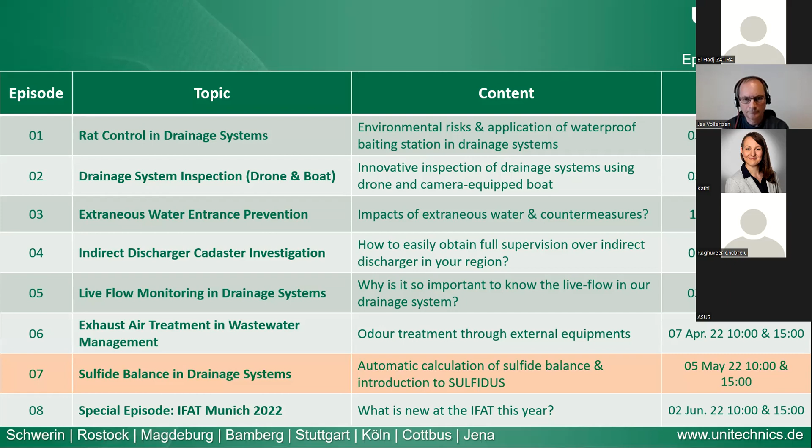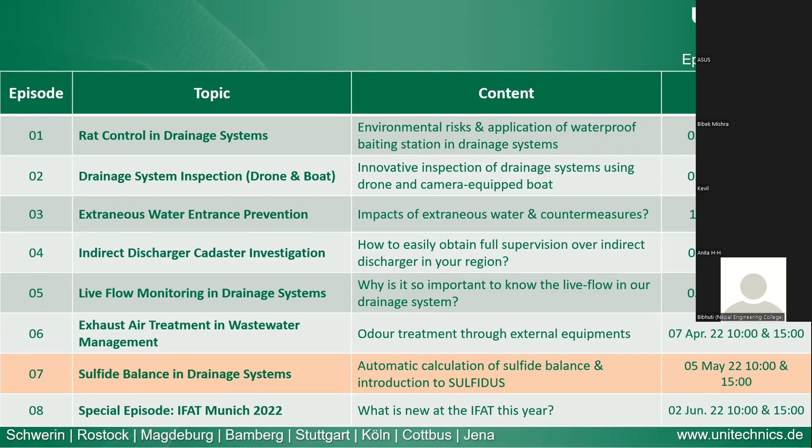Okay, besides Klaus, we still have a participant, Asus. I think that's... okay, can you hear us? Hello, yes, hello.

I'm Zeynep Amin, I'm Iranian but I'm connecting from Turkey. I have a PhD degree in environmental engineering, especially I've worked about wastewater sludge and drying it and composition by renewable energy, by solar dryer. So that's my major, thank you so much.

Thank you very much and welcome to Wastewater Talk. Now we have Klaus back. I'm sorry, I had a private emergency, but I heard everything. So, Klaus Jirk, my name. Siqi and me, we are providing a little bit of organization for all of this, and I'm looking forward to all of your opinions and so on.

And the current issue was a wish from some of our participants earlier. We had a similar issue like today already, a little bit ago, like 6 months ago. And today we hope it's still interesting - odors are still a problem, especially when it gets warmer. So I'm looking forward to everybody's opinion.

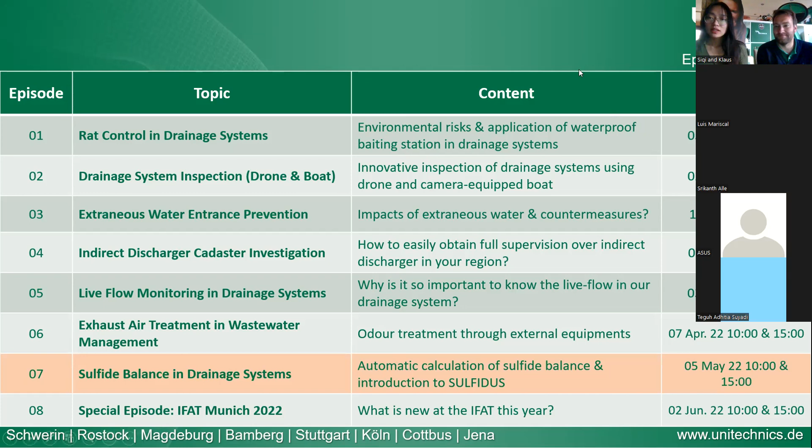Good, thank you. So I will go on with my presentation. As usual, a very quick introduction to Unitechnics. We're an engineering company based in Germany. We deal with odors, corrosion, extraneous water, any kind of problems that you could find in sewer systems. Last year we just celebrated our 30th anniversary, and we offer engineering consulting, investigate the indirect discharge for municipalities. We also inspect the sewer systems with drones or with camera boats.

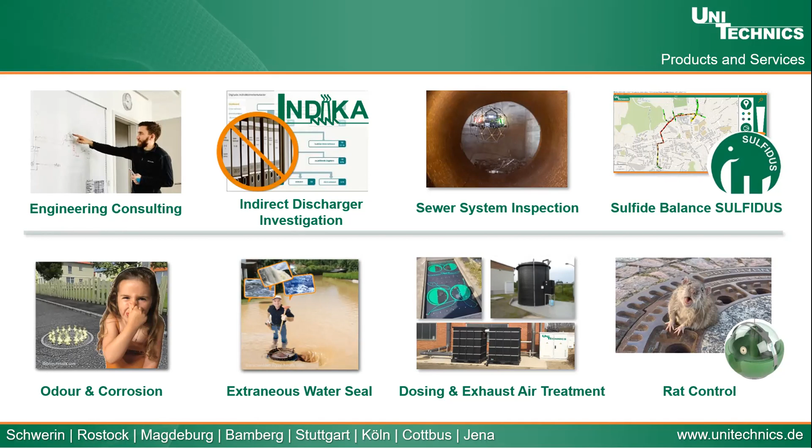And then it's our topic today, the Sulfidus - a software we developed for simulating or modeling the hydrogen sulfide formation and emission in the sewer system. And then we have the products against odor, corrosion, extraneous water, and rats. And for special cases, we also design the dosing and exhaust air treatment, which was the topic of the last episode. So we will jump into today's topic.

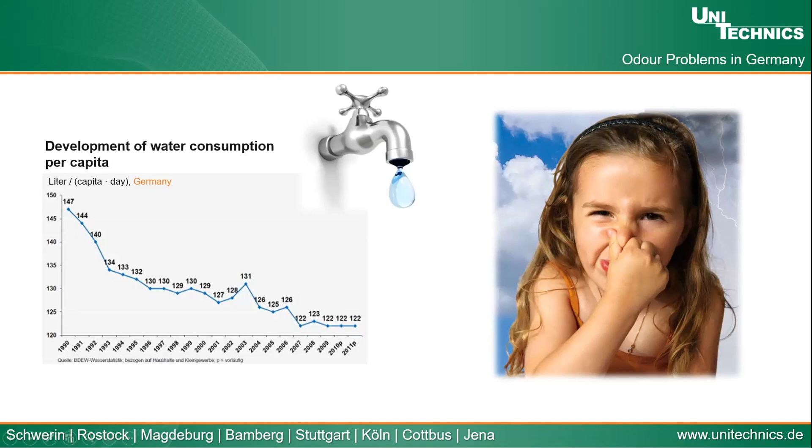To talk about odor problems and odor solutions, we first need to understand the odor problems in Germany. You can see from this diagram here, from 1990 till now, the water consumption in Germany per capita has been decreasing rapidly, and with less water consumption, there's also less wastewater generation, but we still have the same size of sewer systems underground. That leads to a longer retention time of the wastewater in our sewer systems.

This will be a contributor to the formation of the malodors, such as the hydrogen sulfide and many others. Another contributor in Germany is that you can see from this photo that we have these manhole covers, and no, not like the manhole covers I have seen in other countries.

Here we have these ventilation holes, and this will lead to another topic about whether we should have them so that the corrosion situation in our shafts will be less severe, or should we remove them so we don't have odor problems in the city, but there will be more severe corrosion problems in the shafts. So this we can also save for the discussions later.

Anyway, you see with these holes, it brings the problems that were underground now above the ground. So the hydrogen sulfide that has been formed in our sewer systems now will emit out through these holes into the city. And then you get complaints from citizens that they smell the odor, and that's very unpleasant. And then that's the time when the cities or municipalities need to do something against this odor.

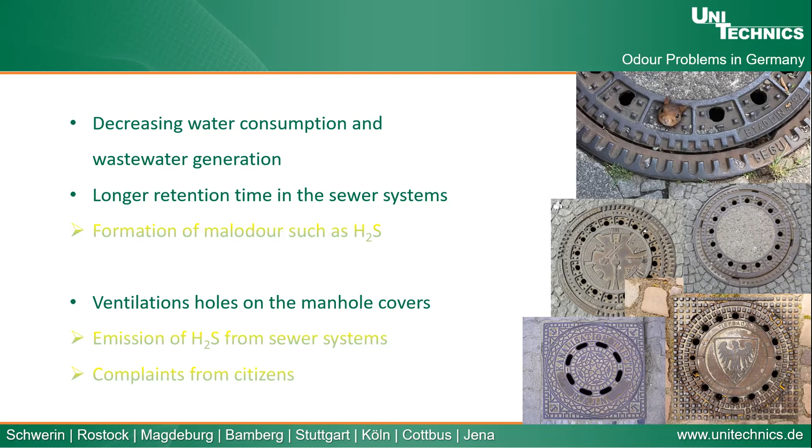So here with this photo, you can have a clear view about the sulfide transformation, conversion, or formation in the sewer systems. So with long

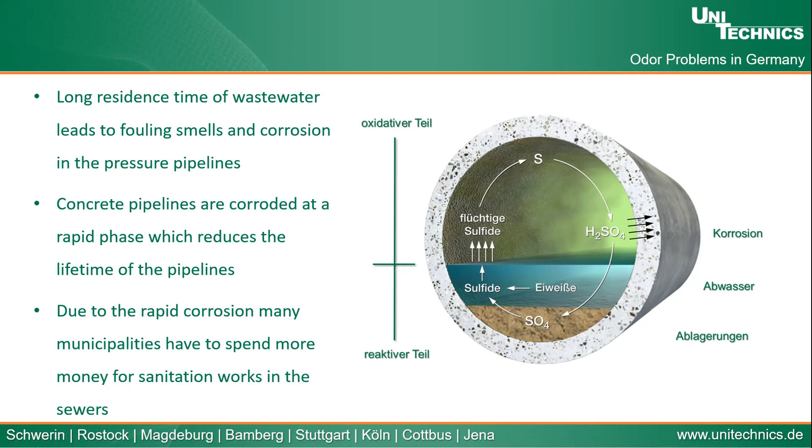retention time of the wastewater in our sewer systems, it will lead to fouling smells and corrosion in our pressure pipelines. And these concrete pipelines will be corroded at a rapid pace, which will reduce the lifetime of the pipelines. That means the city will pay more money for maintenance or sanitation of the sewers, and that's not what they want. And that will lead to our solution to it.

In the past, we did this sulfide modeling or simulation manually with thousands of tables. And since 2014, we combined all these manual tables into a software called Sulfidus, so that we can simulate this sulfide formation and generation in our sewers in a faster way.

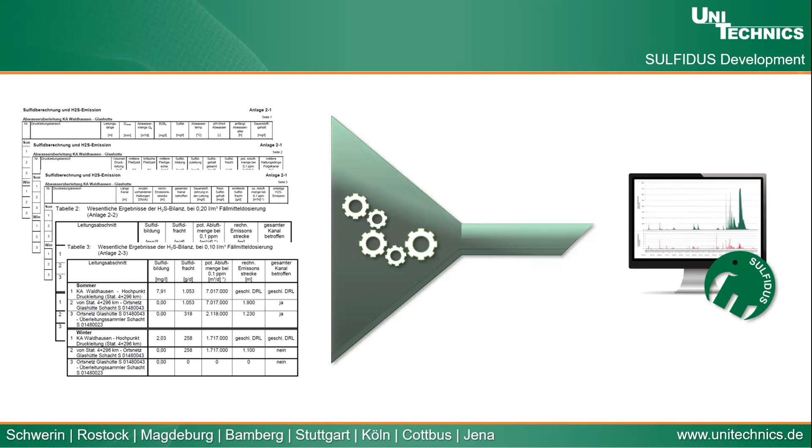So what does this software do, or what is our solution? We use this software first to digitalize the drainage systems. This information is normally given by the cities, and then we simulate different complex processes under different situations, or scenarios: the best case, worst case, the standard case.

And then we calculate the oxygen consumption and, most importantly, the hydrogen sulfide formation. The results will then be visualized on a map for better understanding, so that everyone can understand where the problem is and how severe it is.

And this I will also show in the later slides. With this software, we try to identify the odor emission or the biogenic corrosion development at an early stage. And also for the cities, with the new planning of the sewer systems, we can optimize these systems for the operators and the planners.

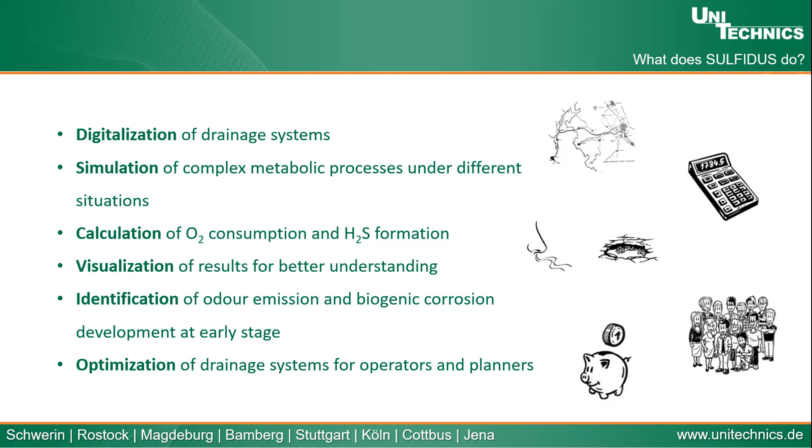The workflow of this Sulfidus can be divided into 5 steps. First, we analyze the input data, which normally comes from the cities, like I mentioned before. Then we model this sulfide generation with this input data to find out the track of the emission and also the potential damage.

Then we have different options against this odor. After the simulation in Sulfidus, we have a clear view about how severe the odor problems are in a city. And then we can choose the optimal solution from the different options that we have.

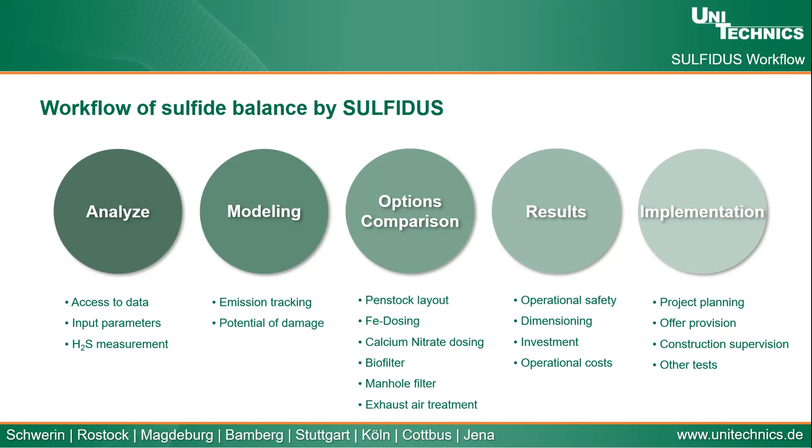For example, we can use a dosing system, or a biofilter or filter that can be easily installed in the manhole, or exhaust air treatment. From this alternative analysis, we get the results, the options that we want. We need the information for the dimensioning, and we also give the information for the investment and operational cost and so on. In the end, we implement these solutions, for example, install the exhaust air treatment, or build in the biofilter or manhole filter, or establish a dosing system.

This is the user interface of Sulfidus, and you can see here is the map of the area of interest, and on the right side is the toolbar where you can draw the wastewater pipeline systems manually with different types, like pure rainwater, pure wastewater, combined wastewater, or pressure pipelines.

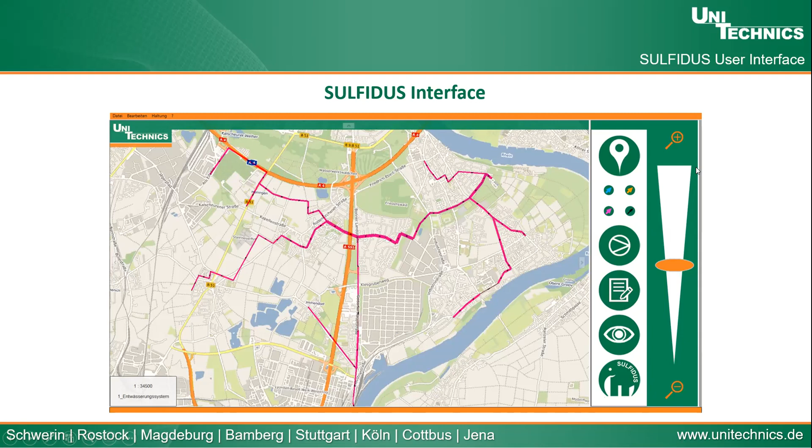You can give the input data by clicking here, or review the results with this eye icon, and this elephant icon with Sulfidus written on it is the calculation button. And here you can zoom in and zoom out to have a better look at the results.

So for the input data, there is basic data and additional data. Basic data includes the diameter of the pipeline, length, how much water flows, and the basic parameters for wastewater quality. Additional data includes secondary inflow, the type of drainage system, operating roughness, and so on.

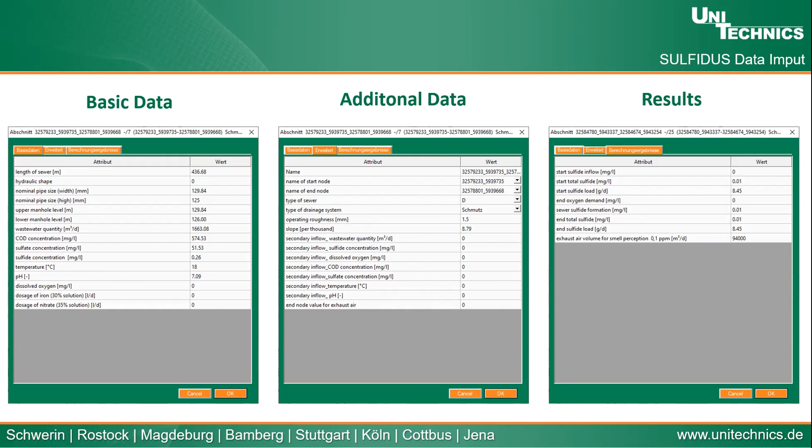After the analysis or simulation in Sulfidus, we have different solutions or recommendations for solving this odor or corrosion problem. Basically there are chemical or physical solutions. The chemical solution is dosing - we can use different chemicals. For physical solutions, we have compressed air flushing, exhaust air treatment or filters, and so on.

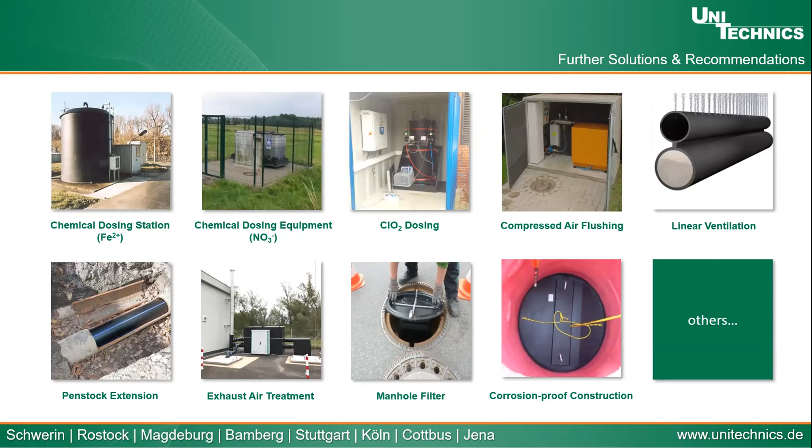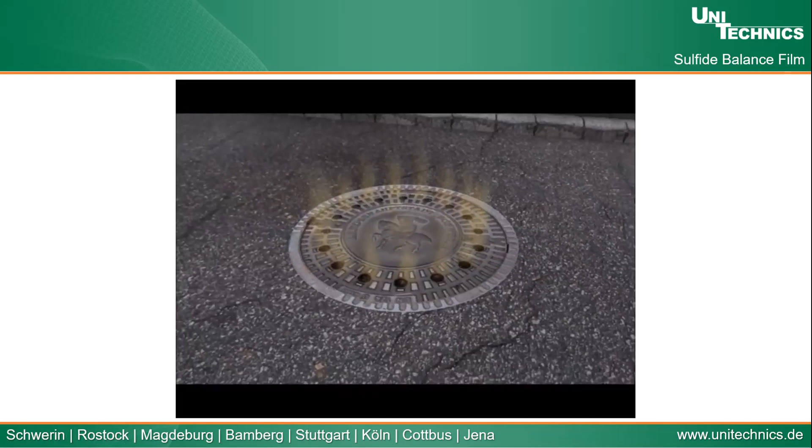So here's a short video explaining the problem with this odor. You see here we have this manhole cover with the ventilation holes, and the odor is emitting out. Under this manhole cover, there's a lot of generation of hydrogen sulfide or other kinds of malodors.

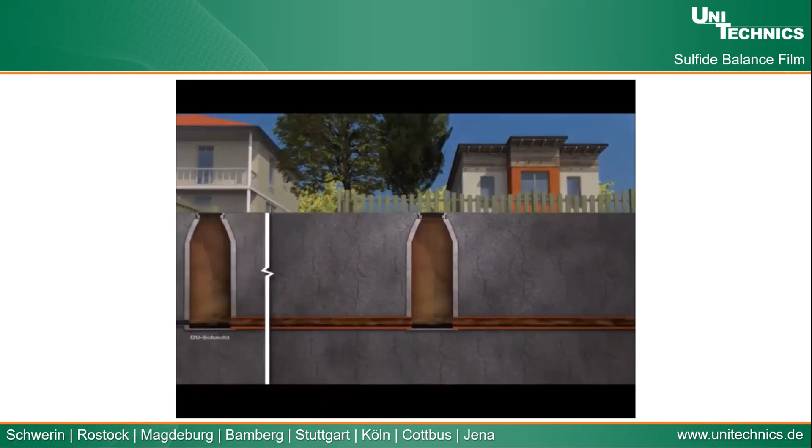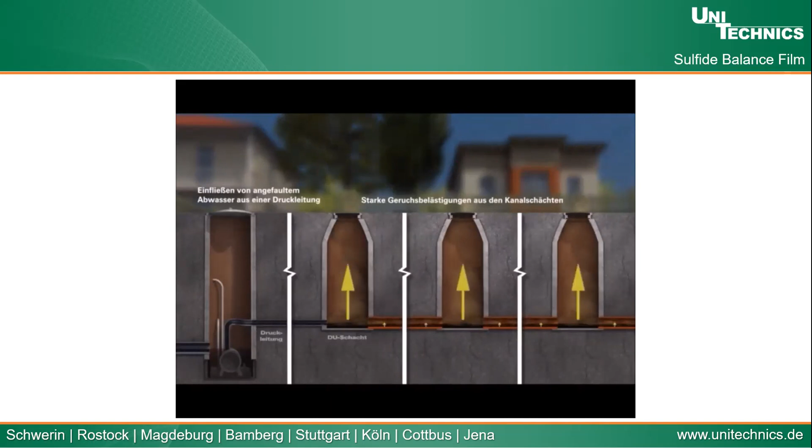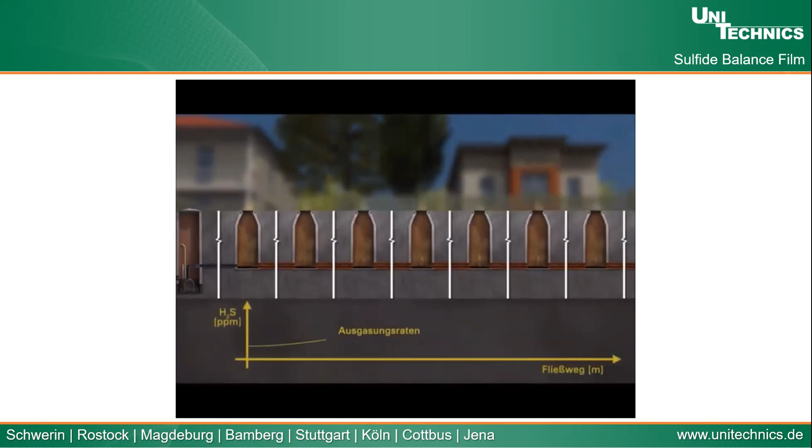On the left side we have a pump station, and the water is being pumped through a pressure pipeline, meaning there's not enough or no supply of oxygen. Later, when the wastewater comes out from the pressure pipeline and reaches the free surface, the odor will emit out.

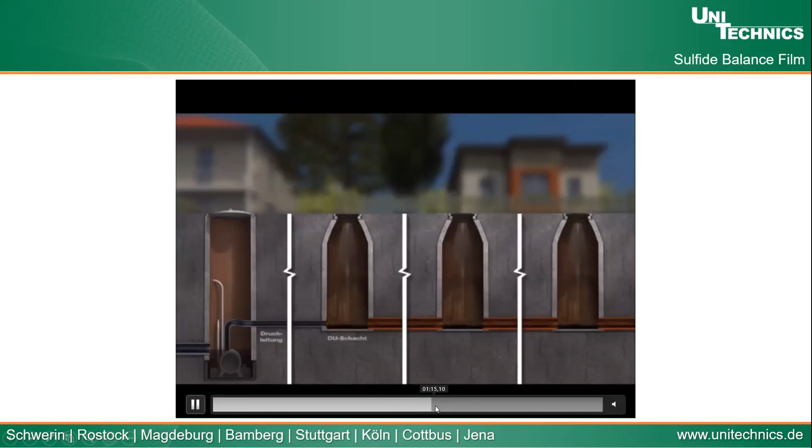In the past, we had this much water consumption, and now water consumption has been decreasing, so is our wastewater generation. That leads to an even more severe problem with odor and corrosion in our sewer systems.

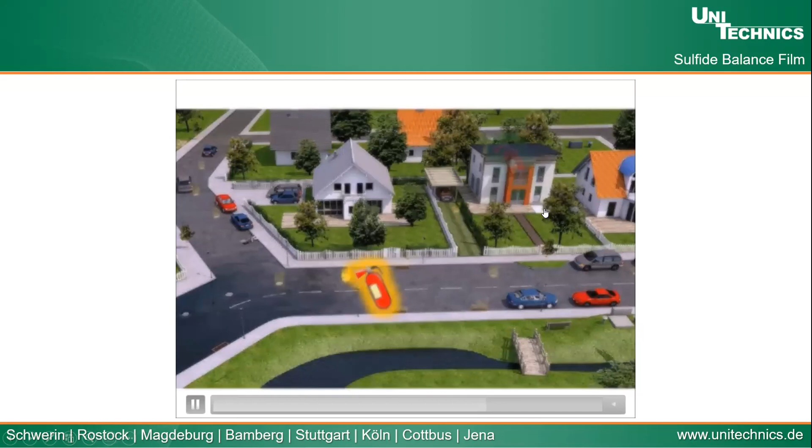So you can detect these odors on the streets, in your own house, or in public areas - anywhere, especially in Germany when you have this ventilation holes.

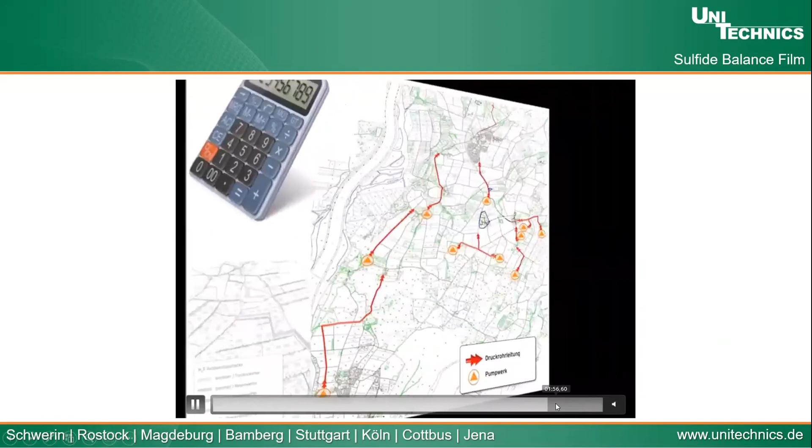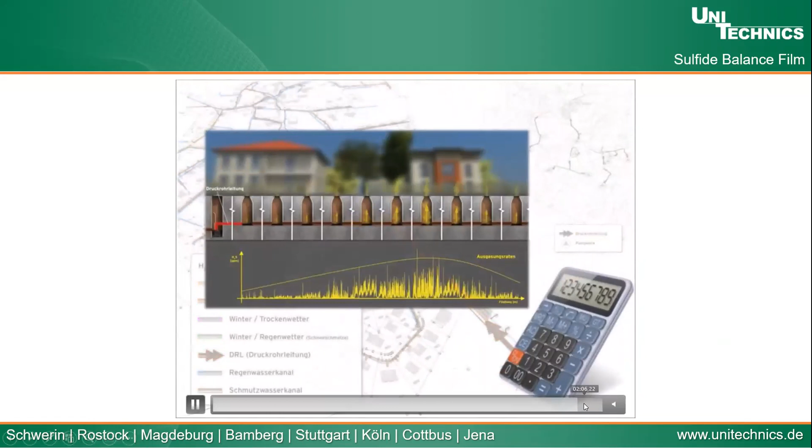So we did our calculation and simulation to develop this software that can simulate the hydrogen sulfide generation and emission track. This will help operators save money and give citizens a better, more pleasant atmosphere.

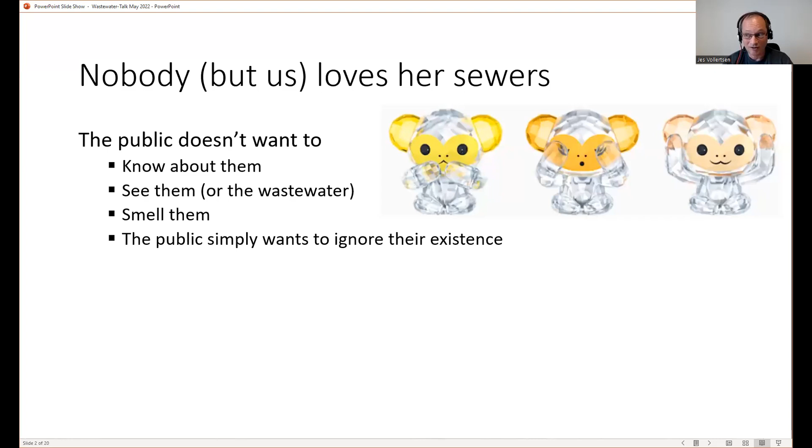When it boils down to what this is about, I think nobody really loves the sewers - maybe we love our sewers, but we're not the general public. If you ask the general public, they do not love them, right? They don't want to know about them, they definitely don't want to see them, like wastewater on the surface, and definitely don't want to smell them. They basically want to ignore their existence. But they do definitely want the service they provide - they want the toilet to work, they want all the services without interruption or fuss. So it is a hidden infrastructure that is super important, but has a little bit of a different life.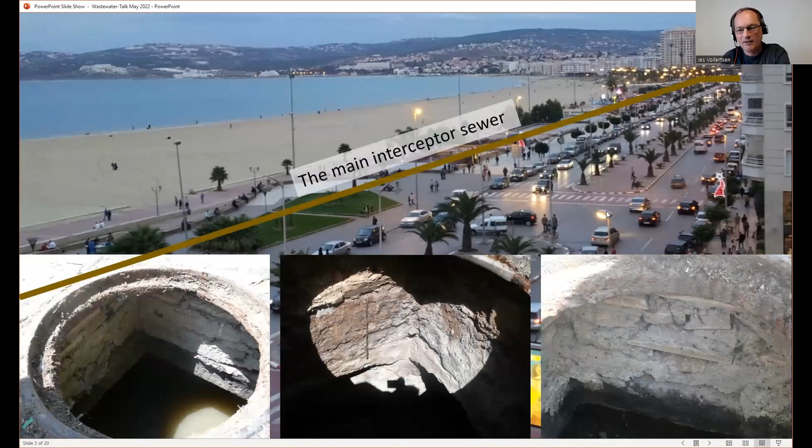The reason why this is not the case is because there are 3 or 4 parallel huge interceptors with stagnant water, not very well operating, lying in the road here. And if you open the manhole covers, it looks like this, right? Corroded concrete, corroded cement, and so on. You see the wastewater there, really stagnant, and it definitely smells.

So you don't want to have your coffee shop and your cafe latte at the beach, and along comes a whiff of sewage. This is not only happening in this place, it's happening everywhere.

This was a very early study we did. I think it was 10 years ago or something. And then we used the software I will come into later on, which we developed, to simulate the system in order to get an understanding.

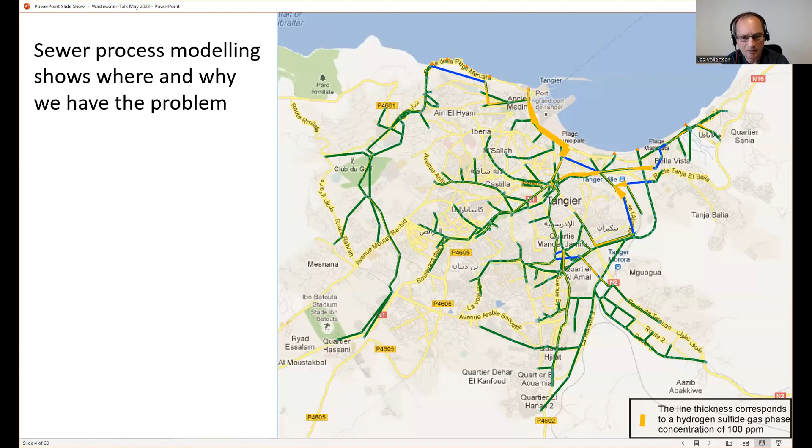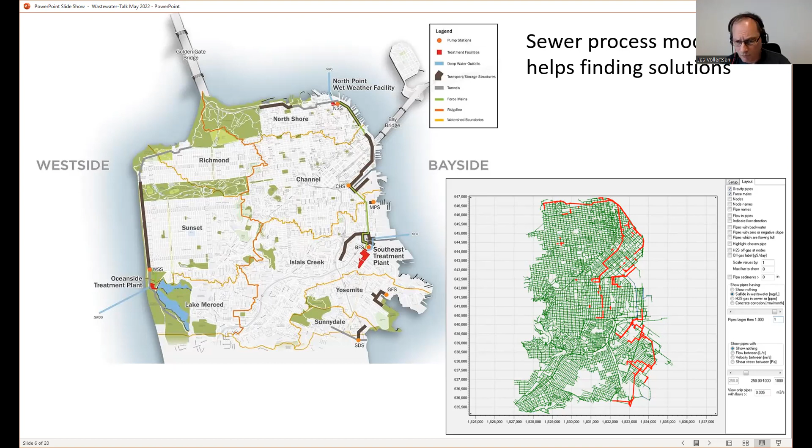This is again some of the early studies we did back in, I think, 2014 or 15, on sewer processes. By the way, the very first study I did on really big catchments was Abu Dhabi in the United Arab Emirates, where we did our first sewer study in 2008, the big one. We also did some before.

Another thing you have to keep in mind when you think about odors is odors is not odors. In some places it does not matter that it stinks, right? This is the wastewater treatment plant of San Francisco. It smells horrible. If you come there, it really stinks. It does not matter, because this is really a bad neighborhood.

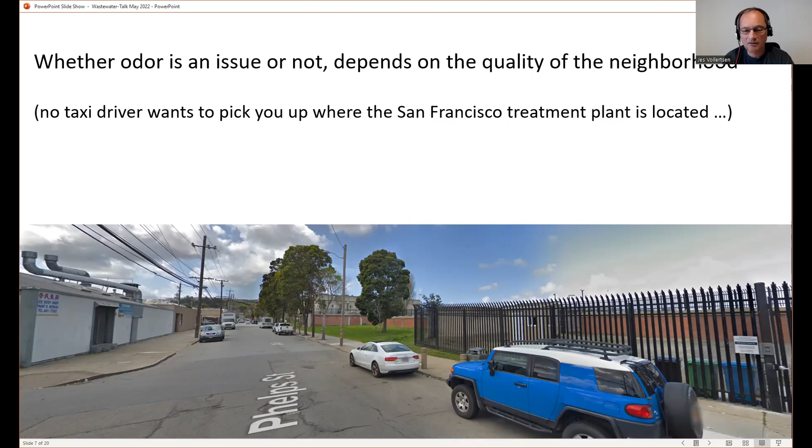It's so bad a neighborhood that the taxi drivers were not coming down there to pick you up. So I at some point got stuck there and couldn't get away from it. It doesn't matter that it stinks there. But if it's Embarcadero, where the tourists are, it matters a lot.

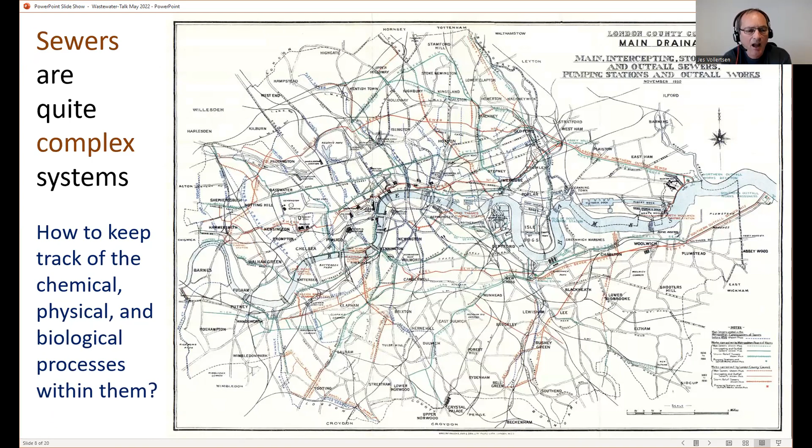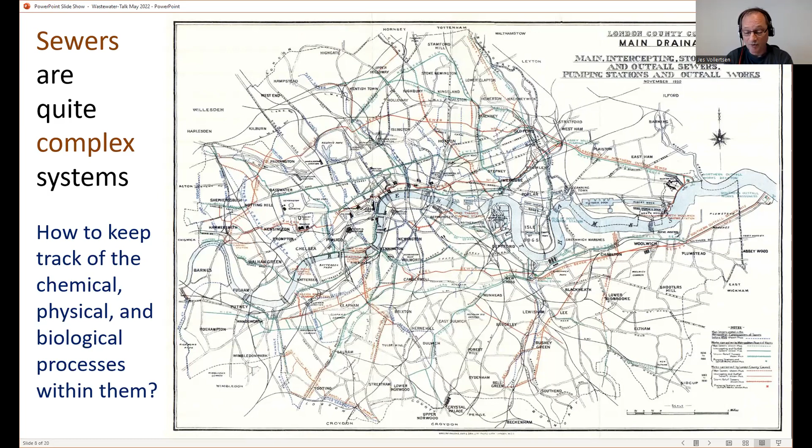So how do we get a grip on all this? How do we get a grip on this fact that sewers are super complex, and how do we keep track of all the chemical and biological processes within them? Because they are pretty complex. Not only the networks - this is an old picture of London, right? Not only the networks, but also what happens in the sewers is pretty complex.

From the very beginning, there was this understanding: let's try to model it. It started out around 1947, with the first risk models saying that if your sewer looks a little bit like this, you have a high risk or low risk for odor and corrosion issues. Then along came the empirical models, which are fundamentally 1 or 2 or 3 equations used to predict sulfide formation, oxygen consumption, and so on.

And then it was developed here in Aalborg in the late 90s. We developed a process concept, and this process concept describes, in principle, all the stuff that happens in the sewers - in the water, in the biofilms, in the sediments, in the air, and whatnot. And then, because, as I mentioned earlier, I am a nerd in programming and coding, I wrote software that could accommodate all these different processes. I'll come back to that.

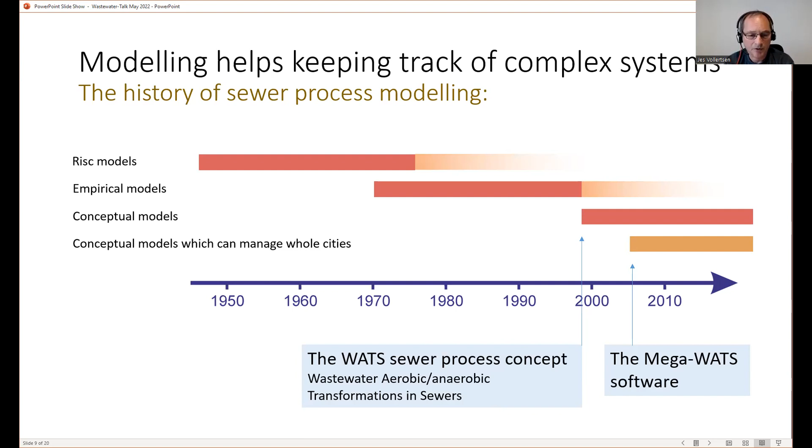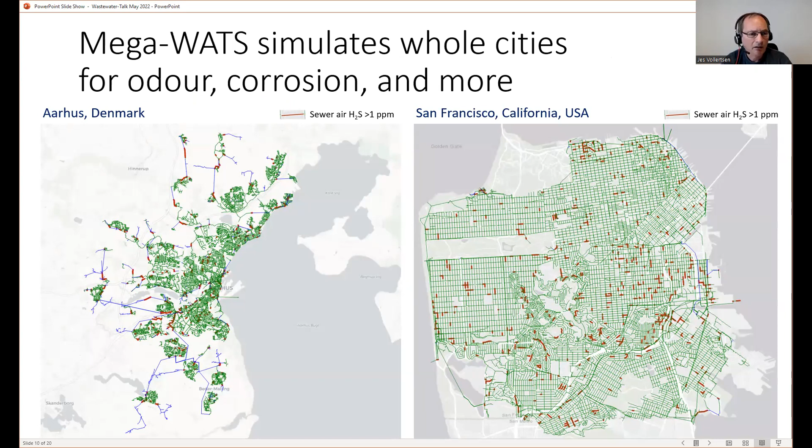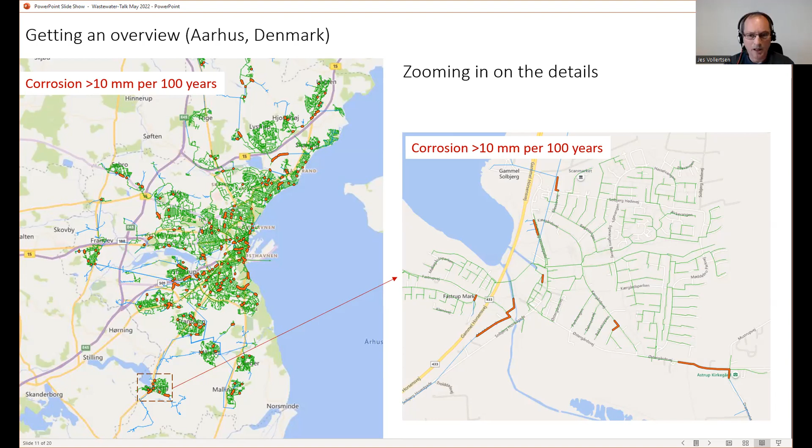It is the model. So what you would use something like this for is then to see, okay, maybe I should focus my CCTV inspection on certain pipes. So you would go in and say, this is maybe a critical pipe. Maybe I would go in here and do some inspection to see if I really have this bad corrosion as the model predicts, and if the pipe is close to collapsing in this case.

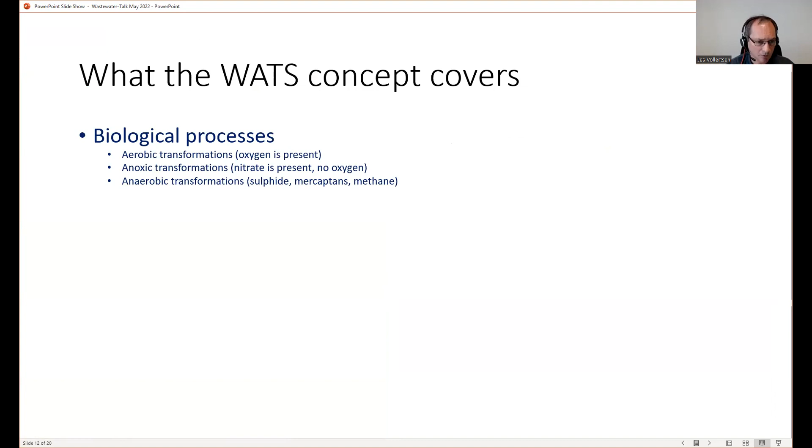Just very shortly to show what the WATS concept does and what the WATS model does. It includes all biological processes, meaning aerobic transformations when oxygen is present, all the anoxic transformations when nitrate is present, and all the anaerobic transformation, meaning it predicts sulfide, mercaptans, methane, and whatnot. Anything you want is basically in.

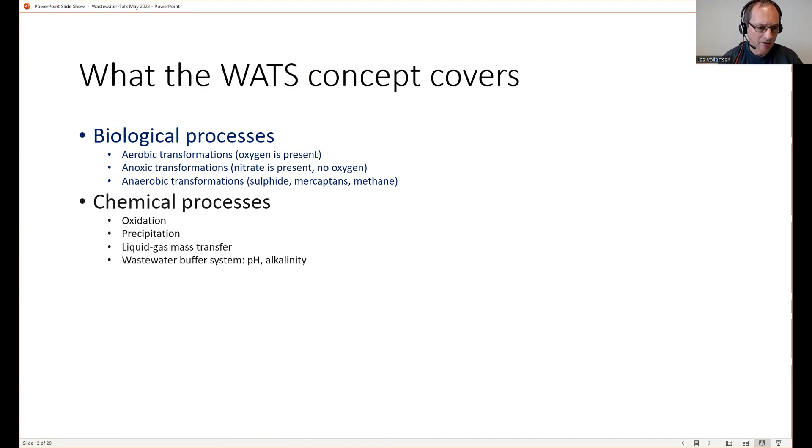It has all the chemical processes, all the oxidation processes, precipitation processes, mass transfer between liquid and gas, the buffer system of the wastewater. And you need the buffer system in order to predict H2S gas emissions. Without that, you cannot really do it, and so on. So it has all these things in it.

It has the hydraulics in it, so it routes the wastewater through the network, so it does its own hydraulics in terms of non-uniform flow. It routes the air through the network by balancing water drag and pipe friction, and then it calculates all the release of gases to the atmosphere. It has all the management solutions you would use in a sewer network.

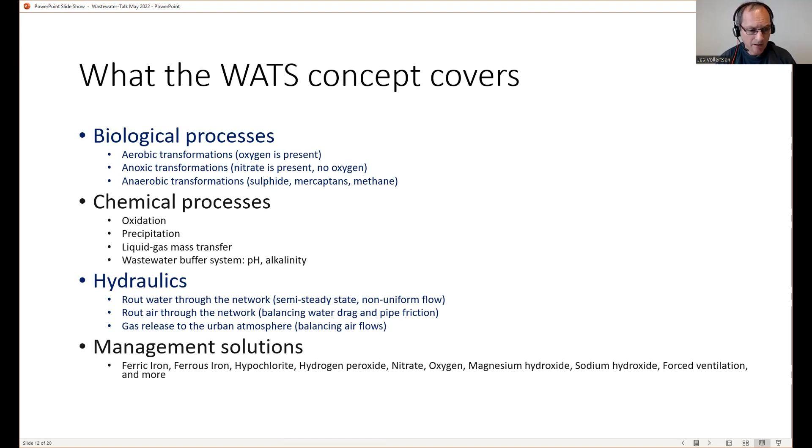They're all in there, and you also can do extreme event statistics using stochastic modeling. And the mathematics behind this is a large number of coupled differential equations which describe all the biological and chemical processes.

This idea of writing a process model this way is definitely not new. It started out in the 70s with the activated sludge models, and anaerobic digestion models, also river models using similar approaches. So it's basically doing it the same way as you would do if you want to simulate a wastewater treatment plant with whatever process model. It's just a little bit more complex because sewers are more complex than treatment plants.

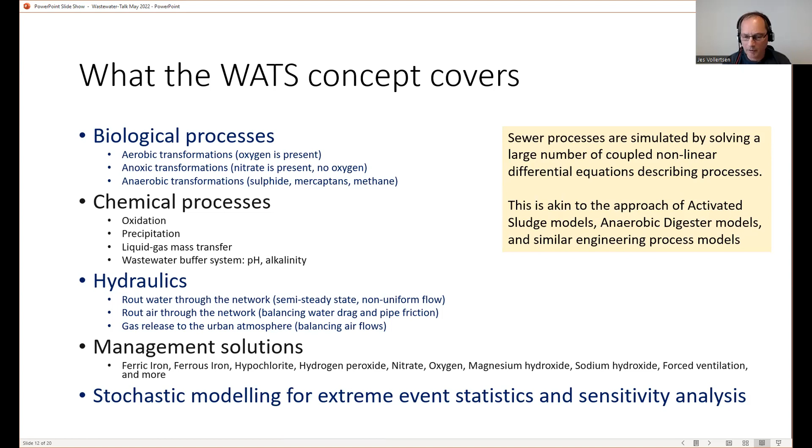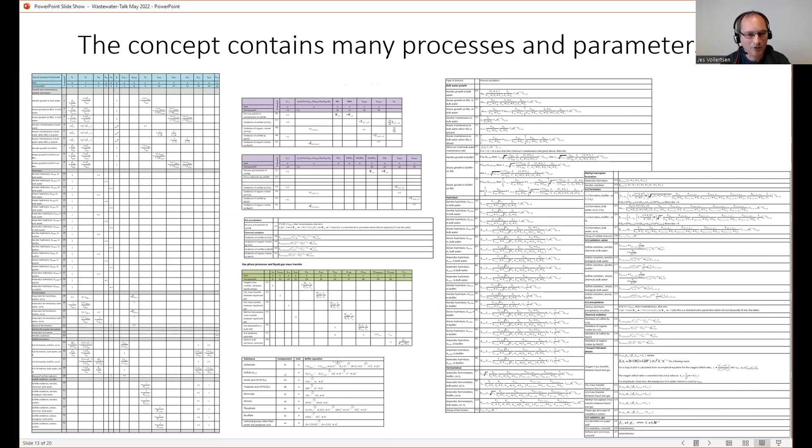For the same reason, it can, without any problems, interact with a wastewater treatment plant model because it basically talks the same language. This is not because you're supposed to read all the equations, it's just to show that there's a lot of math behind this, and because it gives a nice, impressive picture, that's why I put it in. So this is just zooming in and showing what it does.

It calculates each and every pipe meter for meter. This is a piece of San Francisco pipe, 215 meters. You can see the water level, and then you can see how the dissolved oxygen is simulated along the main, and then you can see how, when oxygen just gets depleted, you then see the sulfide increasing. You then see it decreases again, partly because it's released to the sewer air, and partly because it's oxidized chemically and biologically, and all that stuff is in.

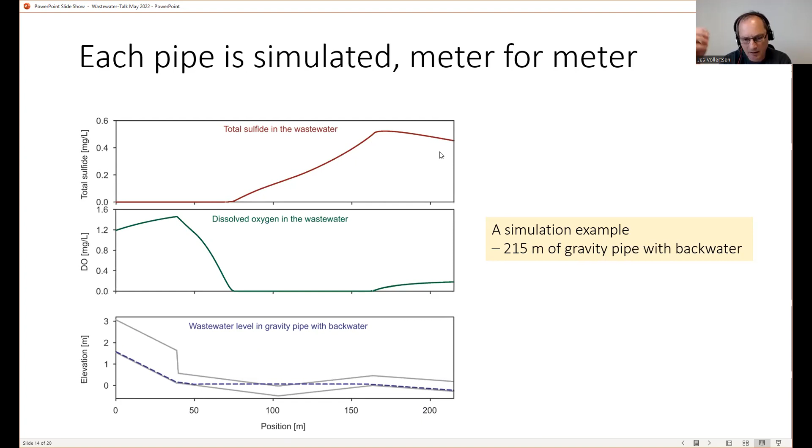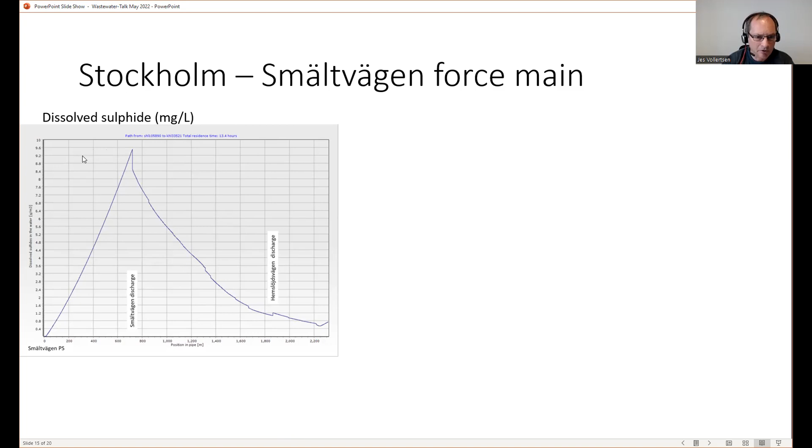Let's go to a concrete example. This is Stockholm in Sweden. This is a force main. And this force main, you can see here, produces a lot of sulfide in the summer period, up to maybe 10 milligrams per liter. And then in the downstream gravity sewer, it disappears.

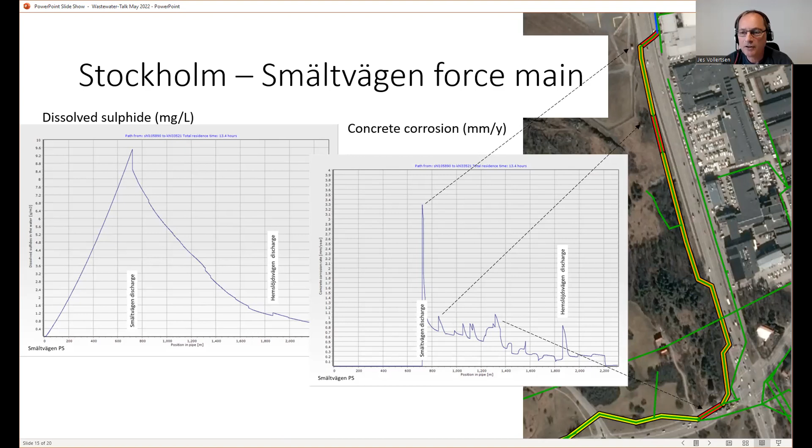You can do all the different solutions, and what solutions you choose. There are many possibilities, based on what type of processes there are. If you understand the processes, you can choose your solutions. I will not go through them all, then we're sitting here for several hours, but there's the whole palette of what you can think of.

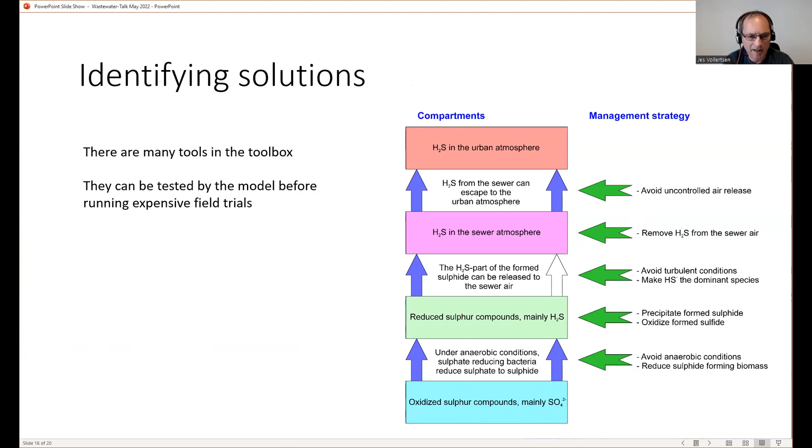Additionally, we also have another model which is linked to the Mega Wasp model. It's MegaVent, and it is a mechanical model. It solves the momentum balance of the airflow, so it's not a process model. It is simply a hydraulic gas flow model, which allows you to predict pressure and air velocities in all the sewer pipes of a network.

So the manhole covers, which Siqi showed earlier, have holes in them. You can put the size of these holes in the manhole cover into the model, and predict if it's a good idea or not to seal the manhole, and what would happen assuming you did it. This of course requires that you actually know the holes in your sewer system, the openings to the sewer atmosphere, and you typically do not really know it.

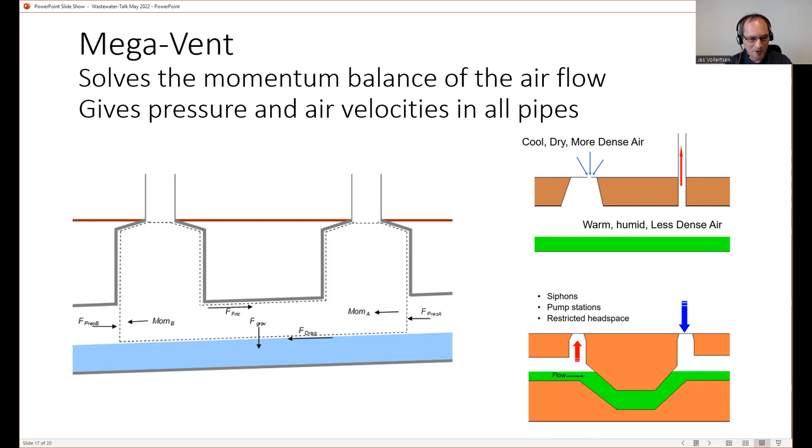So you should do some pressure calibration and so on, but that's a different story. Things are of course much more complex than I'm just talking about now. So there's a lot of work for sewer engineers and all this. We will not be unemployed for the next few millennia.

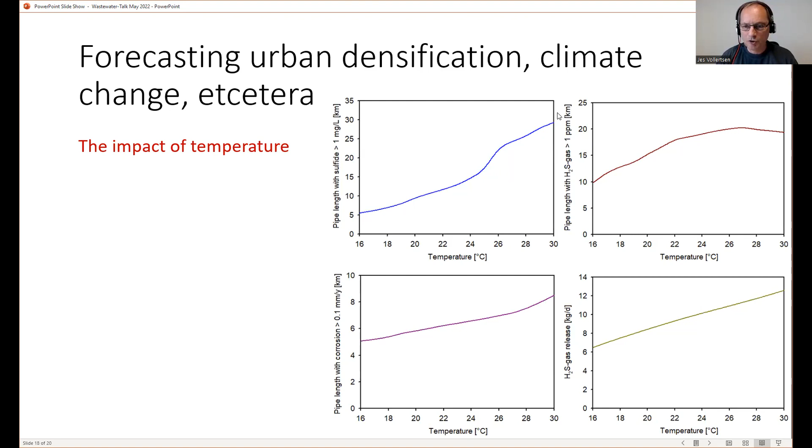What you also can do is forecasting general conditions. This is, I think, from Stockholm, if I remember right - it might also be from the UK, where we do a lot of modeling. This is what happens in a certain catchment if you increase the temperature. You can see, for example, that if you increase the temperature, the length of pipe with certain sulfide content increases significantly. You can also look at what happens, like Siqi showed, with reduced wastewater consumption.

What does that mean for the sulfide? Maybe you have 200 liters per PE per day, for example, and then you decrease it to 140. You can see it will actually have quite a large impact on this catchment on the issues with the sulfide. So you can do this long-term forecasting, climate change scenarios and whatnot.

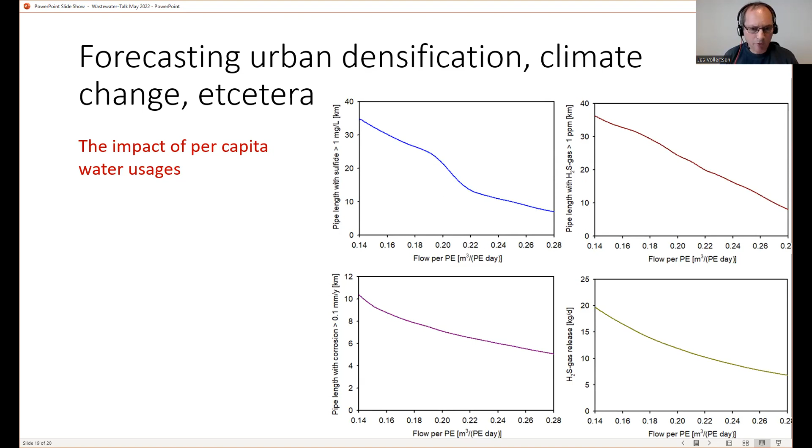Everything with one set of the model, you can do. By the way, setting up the model - if you have a hydrodynamic model set up, if you know your network, it is of course some work to set it up, but it's not a killer. It's definitely doable.

Finally, I would just say that this model is used a lot in the US. Several - Jacobs, for example, is using it, having maybe 15-20 people using it. A lot of HDR in the US are using it, and so on. So several consulting engineering firms, especially in the US, are using it as software. So I think that was it. I can continue forever, but I already promised to talk for 15 minutes. So that's it, thanks.